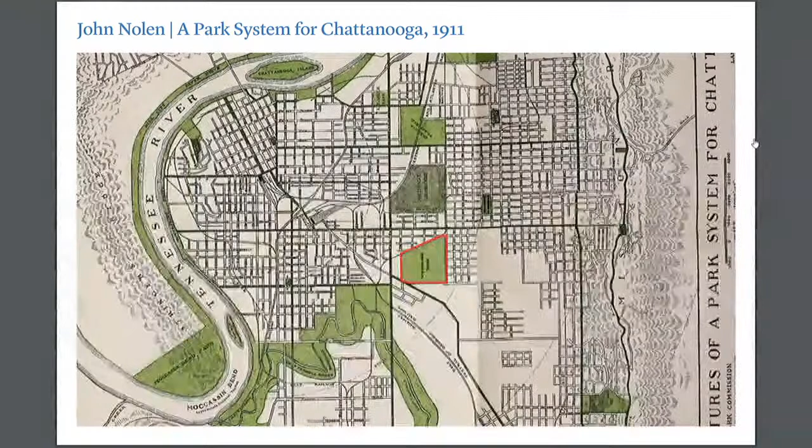We start here with a map you've seen through the Parks and Outdoors plan. This was an area of our town identified in a red square, outlined on this plan produced by John Nolen in 1911, over 100 years ago, identified as Woodland Park. It was park property, owned by the Montague family. Mary Thayer Montague donated the property just after this plan was produced.

The park, as it sits today, lies in a very interesting position, what I call the City Valley — between Missionary Ridge and the Tennessee River, really in North Georgia. It sits in the center of that valley and plays a critical role from an environmental standpoint and a people connectivity standpoint. These circles on the map represent a 15-minute walk shed or roll shed, a 15-minute access point from many of the significant neighborhoods in the city valley, showing how connected and central Montague Park is to this valley.

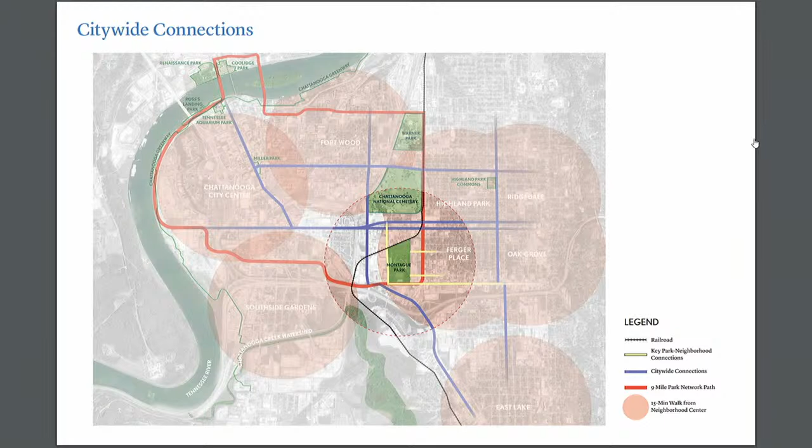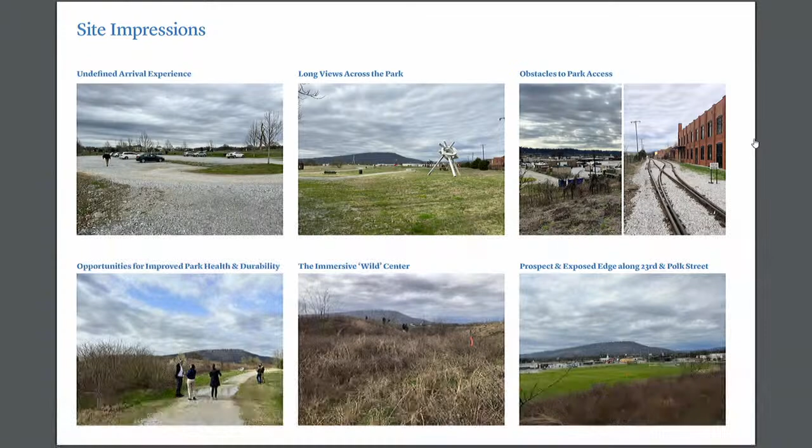We began with the initial part of this process investigating the current improvements to the site: how it functions today, what improvements have been made in the past several years, and noting conditions ranging from areas with little exciting experience to some wonderful views and vistas from this site that are magnificent.

The overall goal of this process was really to honor the two leaseholding groups that are on the site today, both Sculpture Fields and Chattanooga Football Club Foundation, and bring on to this site the thought of having a new market opportunity, whether it be a Main Street Farmers Market or another market. So the real opportunity here to have world-class art exhibit, youth sports, and food all on one site, all on 45 acres in the heart of our urban valley makes a lot of sense.

And how that opportunity comes together really looks like this. We put together a world-class team. With the help of the folks that Scott mentioned earlier, with our steering committee, which involved the leaseholders and other members around the community, we went through a selection process. We selected Reed Hildebrand, who then assembled this magnificent team that you see before you here, with Hillworks, with a brownfield focus. We'll tell you a little bit about what we learned about the brownfield and environmental conditions on the site through David Hill and Hillworks, through Auburn University.

HK Architects was a local architecture firm. Studio Ludo is a nationwide leader in active play and the design of active play environments across the nation. Sherwood Environmental Engineering gives us an incredible understanding of the stormwater potential of the site. Over and under, you'll see a little bit about wayfinding and signage and how to identify the park and make it one umbrella civic spot and civic place. And then Stuart Lynn gave us real-time cost estimating, which we're available to talk to you about at the close of this presentation.

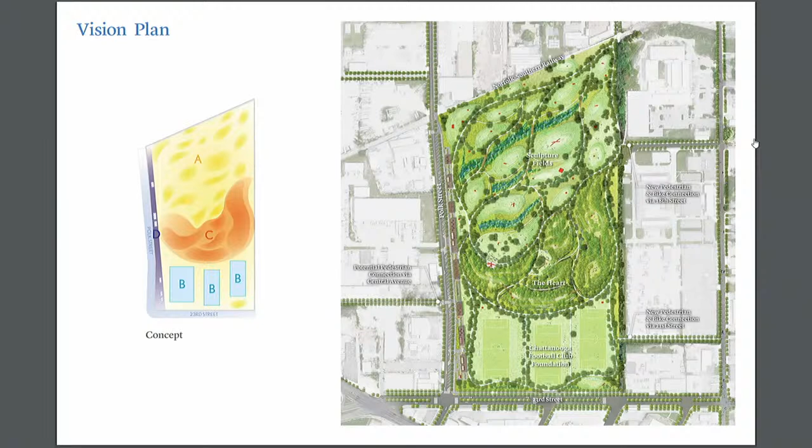Part B, as we move to the south part of the site, is the large open lawn, or the Chattanooga Football Club Foundation fields. You can see 3 fields positioned in that part of the site.

We all need to level set as a community about the environmental conditions on the site. As we know, in the late 40s to the 50s it was designated as a city dump. It was a wet area, and a lagoon was attempted to be made, and it was filled in with city debris. That has been capped and verified by the Department of Environment and Conservation.

The Hillworks team worked heavily with the Department of Environment and Conservation throughout this process to determine what we can do on this site—can we plant trees? Typically, in my position as a designer, when we hear there are environmental conditions and the site has been quote-unquote capped, we think of it as a clay cap that you can't plant on, because roots can damage that cap if trees are blown over in high wind conditions. That is not the case on this site.

What we have is a separation cap. We have 36 inches of soil to keep every one of us here separated from the potential environmental contaminants below. Those potential contaminants have been lying now for several decades, organically decomposing, so the threat of them as we continue to move on is decreasing.

The monitoring wells have been pulled—those monitoring stations that were on the site in the late 2000s were pulled—and that tells you about the confidence in the environmental conditions on the site. It also tells you that the concern for leachates, where water might get into these contaminants and leach into Chattanooga Creek or other portions of the site, is not present. So that level sets your understanding about what we can do on the site and what opportunities are afforded to us as the environmental concerns face all of us.

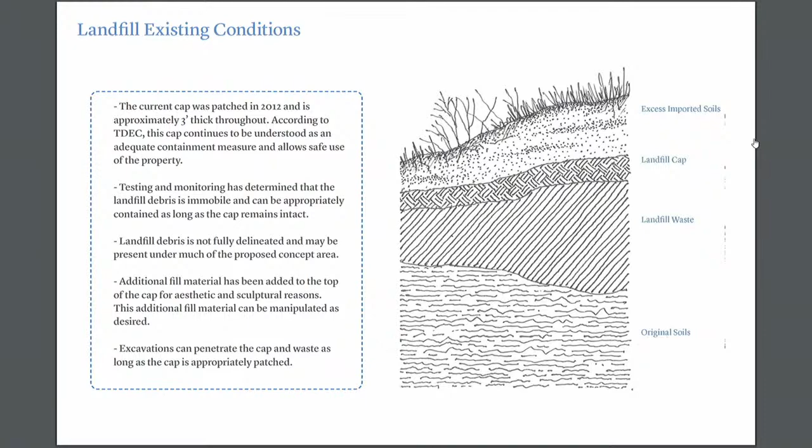And it really puts us here, and this is really dynamic. I don't think any one of us who got involved in this process early thought we could achieve something as grand, as magnificent as this because of that last slide. But it really gives us the opportunity to experience 4, if not 400, experiences on this site.

These are the main 4 experiences you're going to see in illustrated renderings of the portions of the park. From the upper left, the Polk Street edge, which we're considering an urban edge along Polk Street to be a main entrance to the park. That's where all of the physical structures are going to be—if you need to use the restroom, it's going to be there; if you want to have a swing, the swings are going to be in that location. I'll take you through that a little bit.

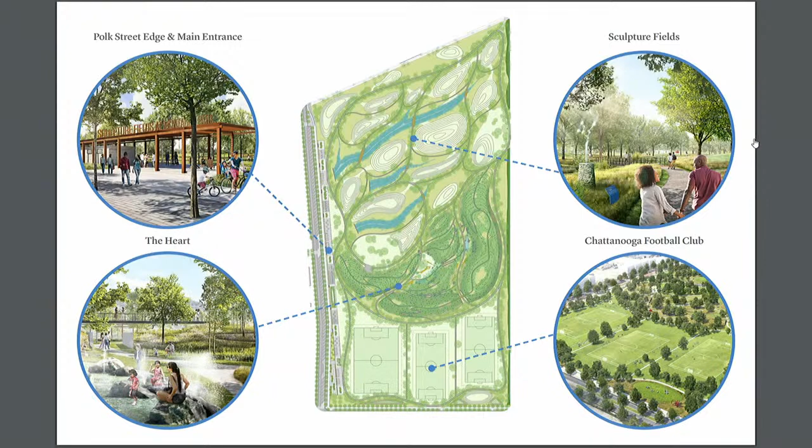On the upper right-hand side is a caption of the sculpture fields, a sculpture garden. On the lower side is a caption of the heart I mentioned, this grove or grotto of trees in the center of the site—the melding of those 2 activities. And the Chattanooga Football Club and their fields look like this from an aerial shot. Again, you can see sculptures positioned all through the entire 45 acres of the site.

The design team really led us through an opportunity to think about circulation intently. One of the interesting things we found out when we went there early was that this is an exercise area for a lot of our community today. You see moms with strollers, people out in exercise and fitness gear, getting a workout and a walk in before work.

The designed loop you see on the right-hand side of the screen in magenta is about a 1 mile loop, designed to accommodate someone doing a 2 mile a day walk. But there's also more thought into how we create a hierarchy of trails throughout the site that creates a different set of unique experiences.

So while you might have that outer trail that's either asphalt or some kind of decomposed stone material, you'll have inner trails that are a little more primitive and challenging, and tertiary paths that are smaller in nature and more intimate in scale to navigate. But then you also have overlook bridges, which you can see in the orange positions on the plan, that give connections to the mounds on the site.

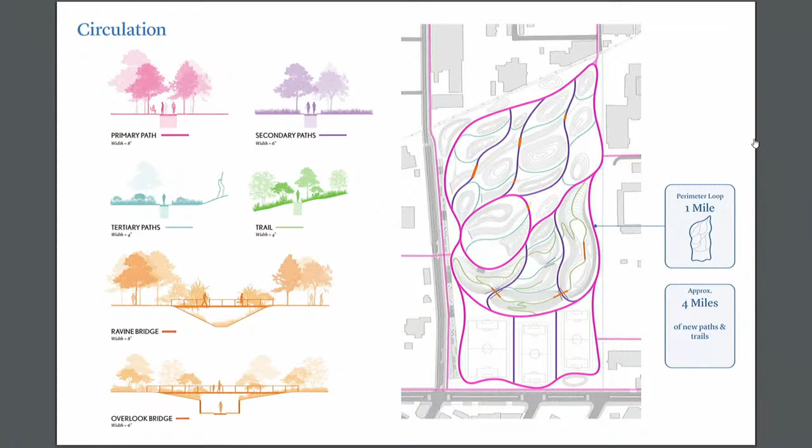This mounding design that John Henry put in place on the site today, where sculptures sit on larger berms, will kind of increase, and those can be connected with pathways on top and with bridges that connect between the two landforms.

We're thinking the site could accommodate water and some stormwater relief to the district. As we did stakeholder meetings and talked with hundreds of abutters of the property owners, we heard a lot about stormwater concerns and flooding issues on the site, prevalent across the west and the east of the site.

We heard from the Tennessee State Armory Guard leadership that the historic buildings on their site are being compromised by flooding issues. So it behooves us to think about strategies to capture stormwater on site and mitigate some of the flooding pressures happening downstream and away from us. We learned a little bit about that.

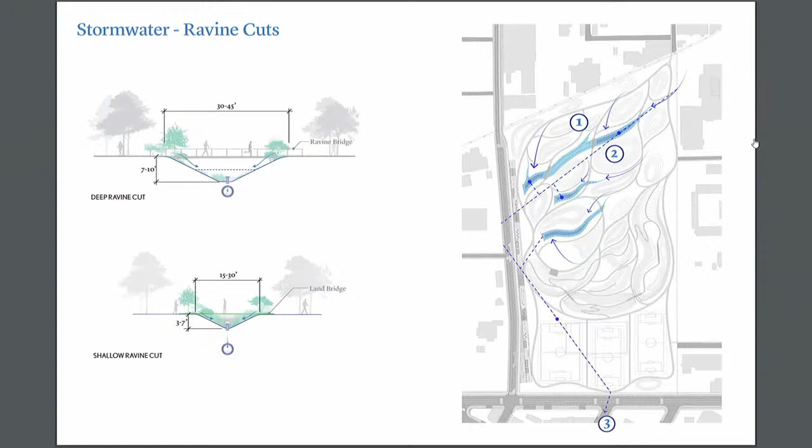There's a lot more to go into. This is a master plan, not the full engineering design, but we think some ravine cuts into this site would be very beneficial, both experientially and for the stormwater effects of the district.

We know that planting is one of our largest opportunities to mitigate the urban heat island effect of most of the urban valley, and this is one of our key sites to do that. Increasing the tree canopy on site, both with tree-lined walkways and in the heart, is an incredible opportunity for us, with biodiversity in tree species and plantings on this 45 acres.

So regarding ground cover, we also talked with the design team about an early palette of landscape materials, from large-scale plantings, trees, deciduous and otherwise, down to ground cover, all creating that outdoor gallery room for the sculpture garden and for the football club, giving you interest and availability every season you visit the park, not just at one time.

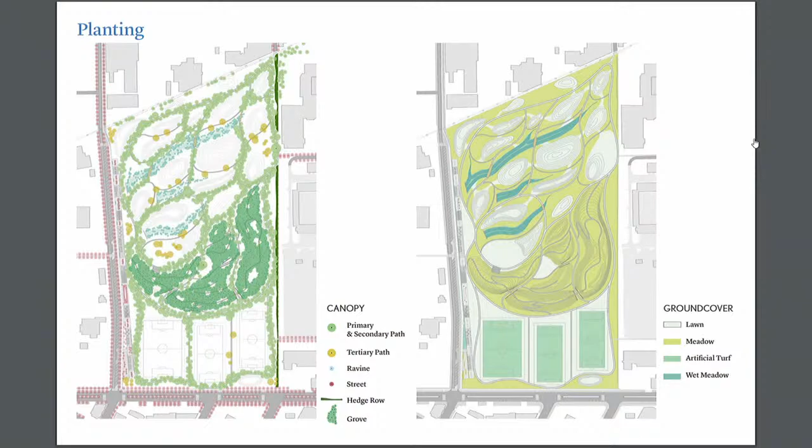This plant palette has been really thoughtful, really thought through about what is the true landscape nature of the South, and what plants provide that soft structure, that wispy nature, or the waxy, more structured leaf, that can provide a very interesting landscape background and backdrop to the rooms and experiences on site.

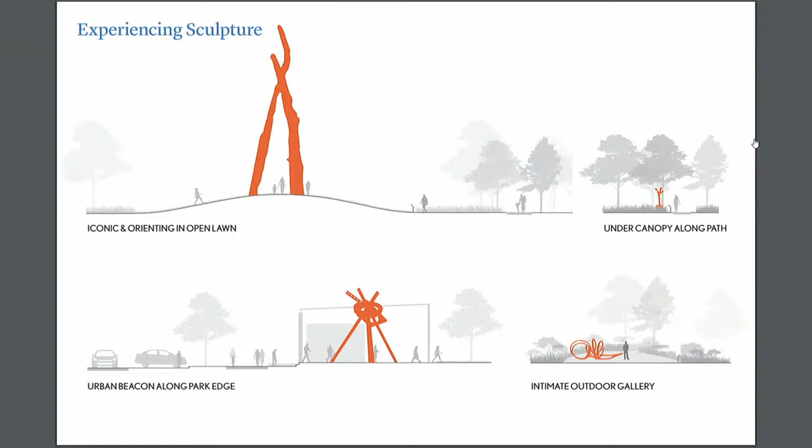Also plenty of attention given to the outdoor sculpture garden as an exhibit, and the ways in which those rooms are shaped. We think there's plenty of opportunity along the pathways and tertiary paths to have sculpture, whether in naturalized areas or otherwise. There are places for a small lawn setting with a slope for an intimate outdoor gallery, and places where we need monumental sculpture areas with great lawns to accommodate that. I'm going to take you through a few renderings of what that looks like.

We're calling this rendering the Great Lawn, which would include a large sculpture band shell that could accommodate outdoor performances, or just act like Coolidge Park does, accommodating anyone's individual needs on a daily basis, whether it be throwing a frisbee or otherwise, while also being available for events of up to 2,000 people.

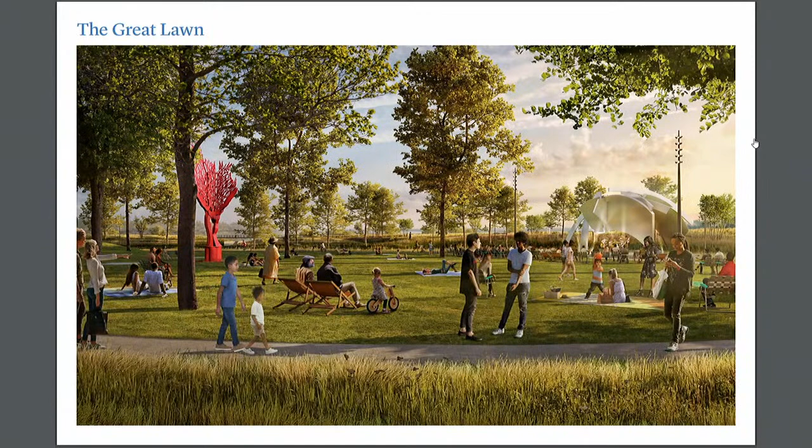We've worked heavily with Crew and his team on how the football club and the Chattanooga Football Club Foundation can use this site on the southern edge for youth sports activities. This is what that layout looks like.

This is what spectator opportunities look like within the three fields I showed you earlier—some informal, some a bit more formal, but primarily informal spectator options. So you're not going to see a bunch of bleachers on the site or formal benching or amphitheater-type staging, but primarily informal seating. The Polk Street edge I mentioned earlier will be the primary edge for servicing the football club and the fields.

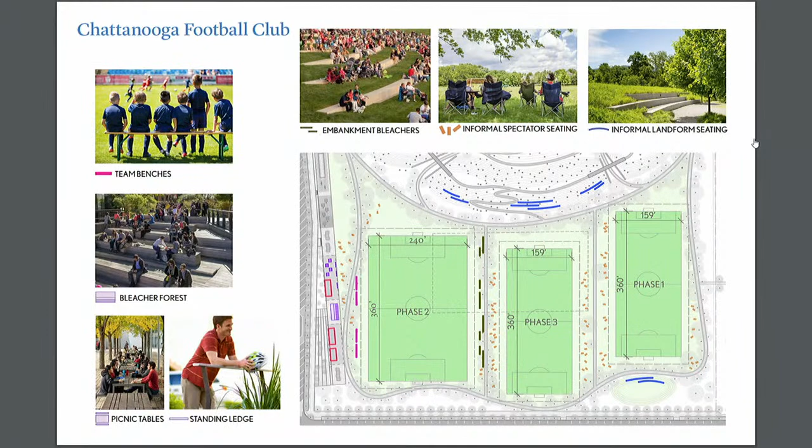This is what that looks like from an aerial. You can see again here on the lower right, places and opportunities for public art and sculpture on this end of the site as well—so it's not just thinking about public art being collected on one end, the north end of the site.

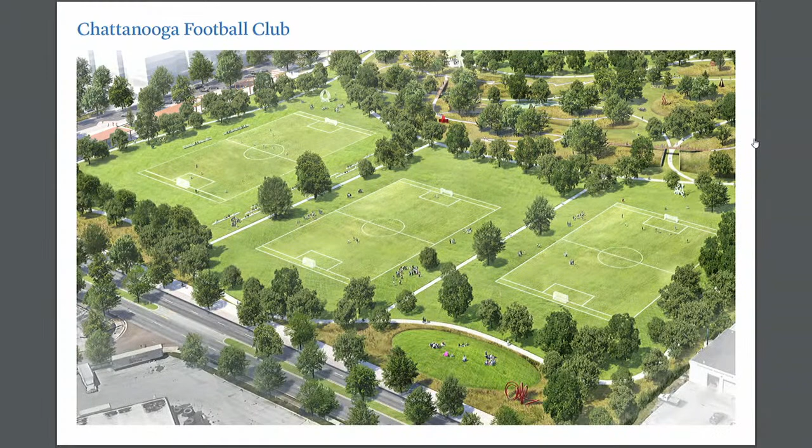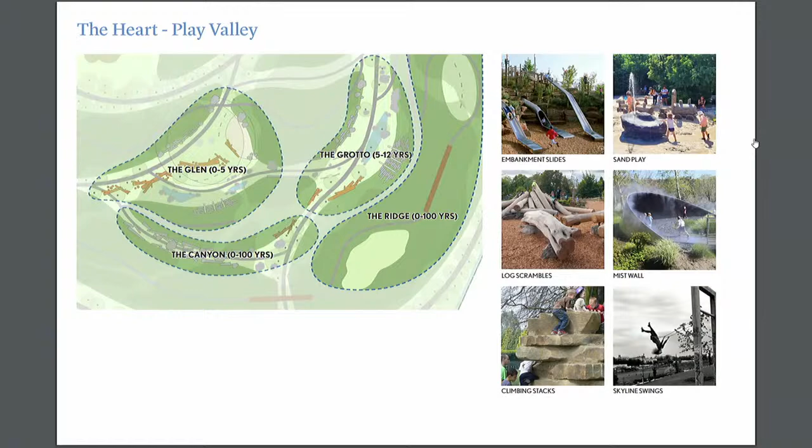We think there's an opportunity to introduce all ages of play within the Heart. You think of the Heart being sculpted and shaded, with opportunities for water and different play segments for children of all ages. Think of those as outdoor rooms—one being the Glen, for very young kids, structured naturally so they can crawl on and play around with it—or the Grotto, probably for older kids who would scramble on boulders and climbing stacks. Really, an opportunity for natural play to be at the heart of the park.

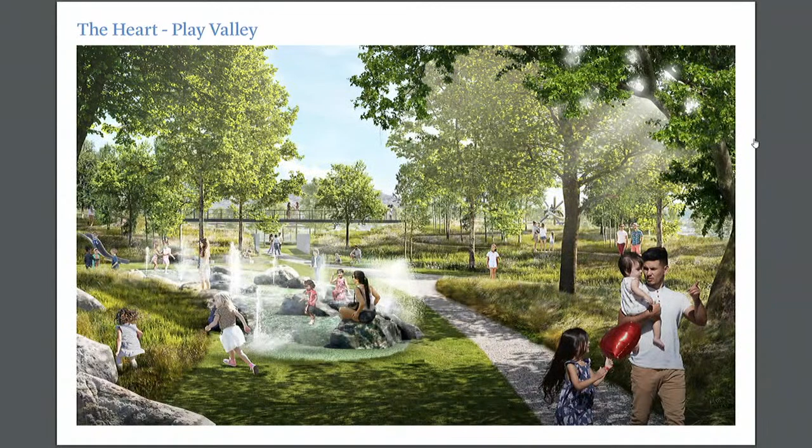And this is what the Heart could look like—it's a really interesting rendering. You can see in the background what I talked about earlier: the bridges connecting to larger landforms, the opportunity to bridge over and under and through on those pathways, how those pathways intersect and become part of the experience of passing through play on the site.

Let's go through the Polk Street Edge. It's probably the most urban connector to what would be a very natural, woodland park experience to visit.

Most of the Polk Street Edge, as designed here, is thought of as pavilion structures with long shade structures accommodating them, with the programming—the things inside buildings—sitting up underneath those. I'll take you through what that looks like in plan.

We talked with a lot of market vendors who say they just need parking and the tent very close by so they can put their goods there, and then all the public could use that shared-use path to access the market stalls. So it's been thought of as a market street, an urban edge that's also a gateway into Montague Park itself.

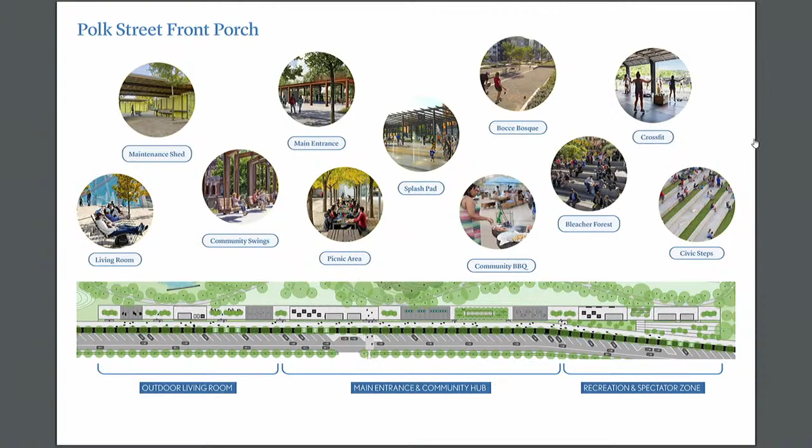So with that, we think we've got a magnificent master plan in place. We think we're at a great place to share this even more publicly and get more input, and we can't wait to hear from you today and answer any questions you have. Thank you for your time.